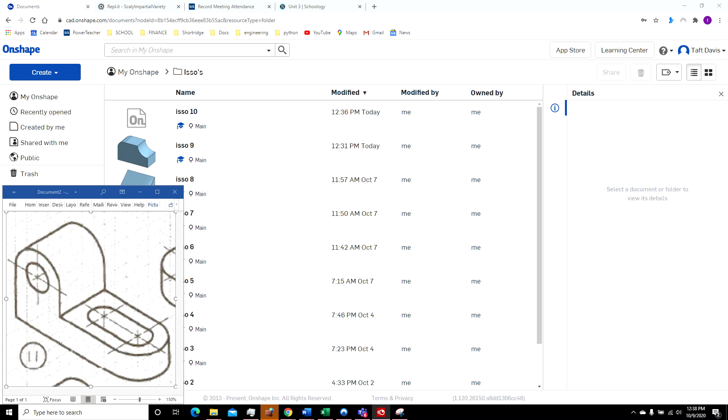All right, now we're going to work on isso 11. I'm already in my Isso's folder, so I'm going to create a document and call this one isso 11.

I want to work on the front view right here and make an L shape, then we're going to use the fillet to round off this top and the side, and then cut our holes through the shapes.

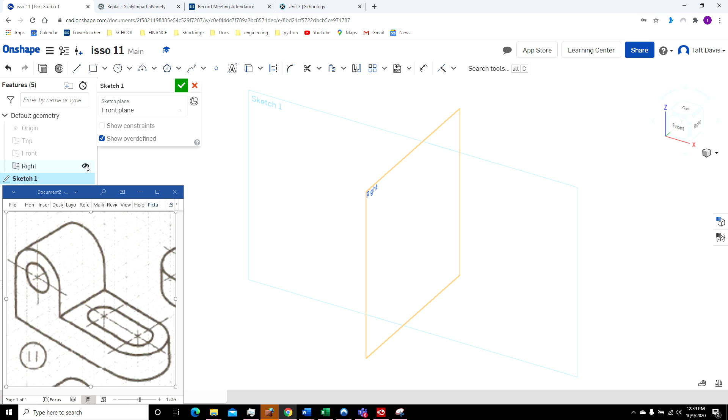So I'm going to click on the front and click Sketch. Hide the other planes and click on front right here. Now there's a couple ways I can do this.

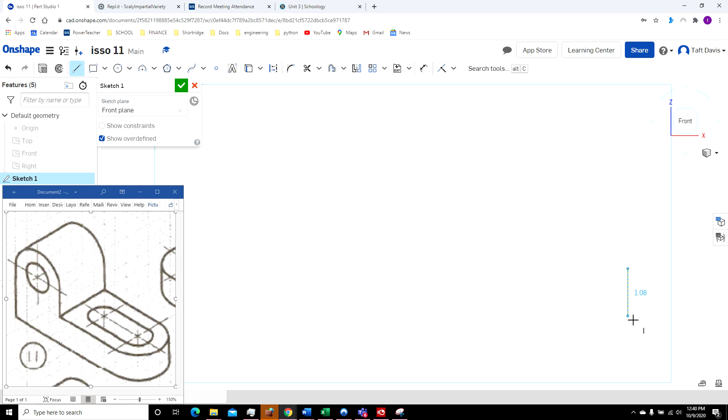I can use the line tool and draw this out, or I could do two rectangles. I think I'll go ahead and use the line tool. I'll start over here on the side, come down, and make this 2 inches. Now I'm going to come across.

If I look at my shape over here, it's 1, 2, 3, 4, 5, 6, 7, 8, 9, 10. And if we come all the way out here, that makes it 11. So I'll type in 11, enter.

Now going up, I want this total height right here, so that goes up 1, 2, 3, 4, 5, 6 places. So I get that dotted line, I can see that it's vertical. So I'm going to type in 6, enter.

And if I look at this, it's 1, 2, 3, 4 inches wide. I'm going to click, type in 4, enter.

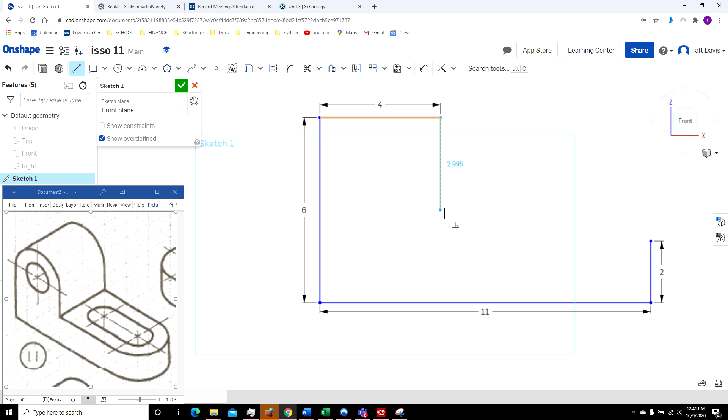Then I know it comes down 4 because that base is 2 inches, the total height is 6. So I'm going to click, type in 4, and then come on over here and connect to this side.

I'm going to click the isometric view. We're going to extrude it, and it's 1, 2, 3, 4 inches deep.

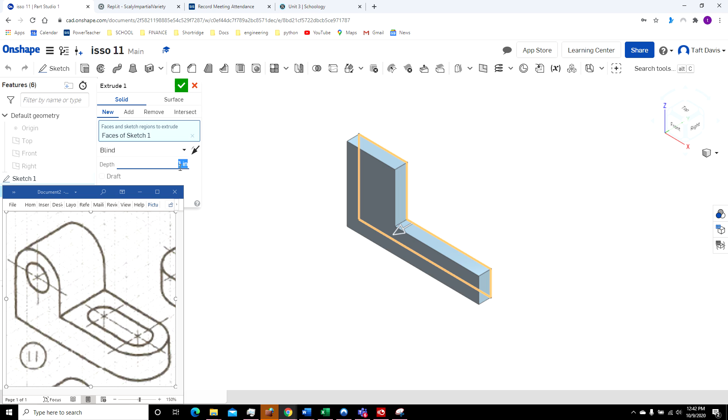Okay, so now I've got this basic shape right here, so I'm going to round these off using the fillet.

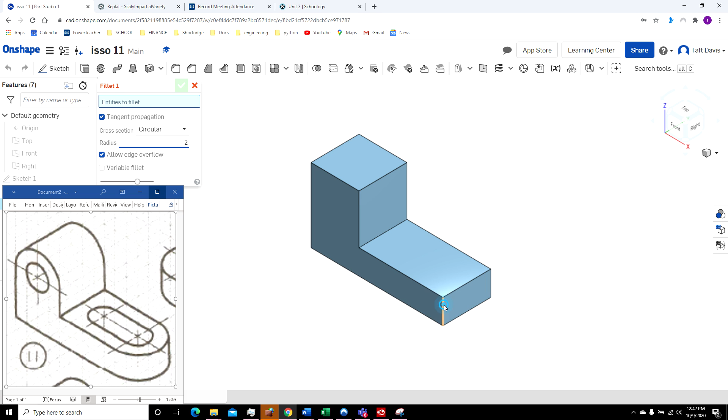Here it's asking for the radius. Since this is 4 inches wide and this is a half circle, that means my radius is 2 inches. So I'm going to click on this corner and this corner.

Now the same up here. This is 4 inches in diameter, which means the radius is 2. I'm going to click there, click there. Check. Okay, so now we've got this basic shape.

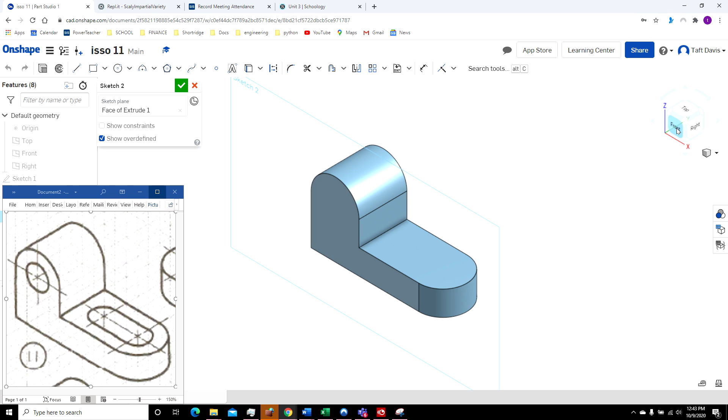I just need to cut the holes in it. I'll cut this circle out first. So I'm going to click on the front, Sketch, and click on front right here.

Move this over a little bit. I'm going to use the center circle. Now, one of the nice things that Onshape does for us, it lets us know when we're at the center of a circle. Okay, so right there, I know I'm at the center, so I'm not even going to have to worry about dimensioning after I make my circle.

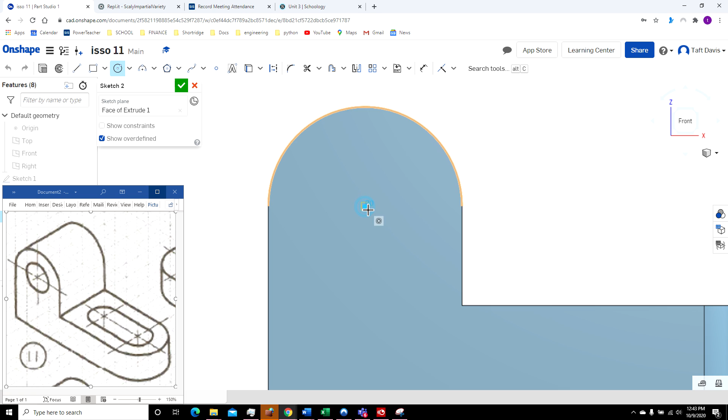And since I'm doing the center circle, I'm going to drag this out. My circle has a diameter of 2 inches, so I just type in 2, enter.

Then I want to extrude. I'll go ahead and make this ISO. I don't want it to go out, I want it to remove.

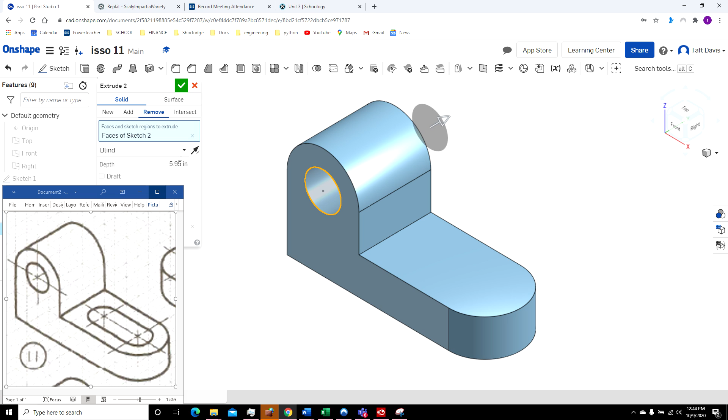And it's okay if I go too far. I mean, I could type in 4 inches right here, but if it goes 5 inches, because when you cut the hole, after you get all the way through, it doesn't matter how far you go, you still have the hole all the way through it. Okay, so now I've got this circle cut out.

Now I need to make this one, so I'm going to do that on this top surface right here. I'm going to click Sketch, click on Top.

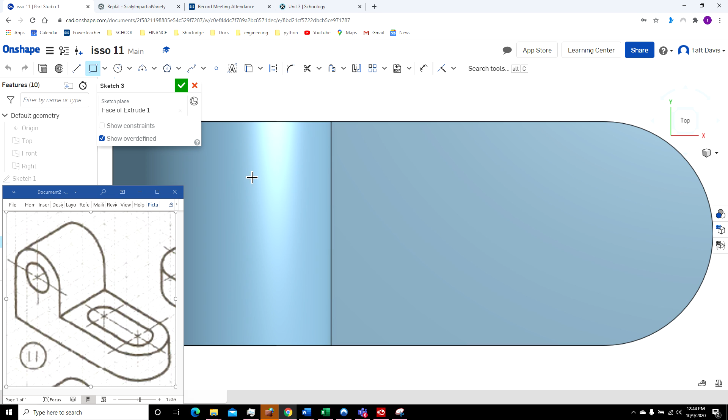Now I'm going to make a rectangle and then use the fillet to round it off. I'm going to come over here, use the 2-point and just kind of drag. Okay, if I look at my rectangle, it's 1, 2, 3, 4, 5 inches long.

I'll type in 5. And then it's 2 inches wide, so I'll say 2, enter.

All right, now if we look at this, it's 1 inch from this edge. It's also 1 inch from that edge, so I can dimension it from either side. So I'm going to dimension. I'll click here, click there, make that 1 inch.

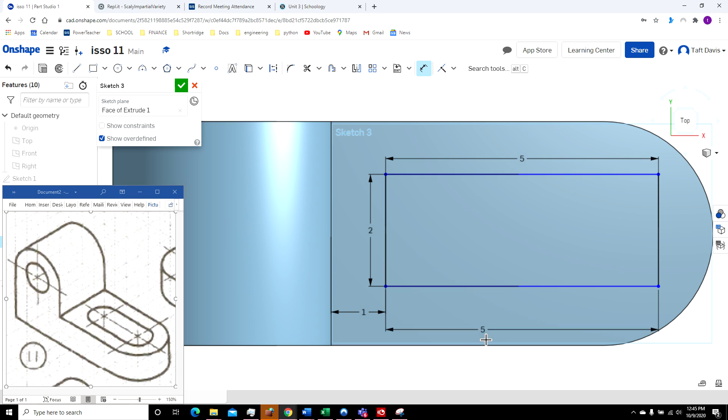Okay, then it's 1 inch from each side here, so it doesn't matter if I do the top or bottom. So I'm going to click here, click there, make that 1 inch.

Okay, I want to click on the isometric view. I want to extrude it. Again, I want to remove, and we need to go at least 2 inches.

All right, now I'm going to use the fillet. And this has a radius of 1 inch. It's got a diameter of 2 inch, radius of 1 inch. So I'm going to type in 1.

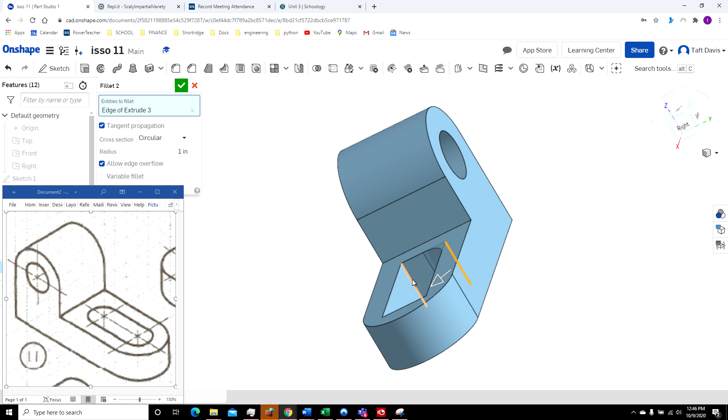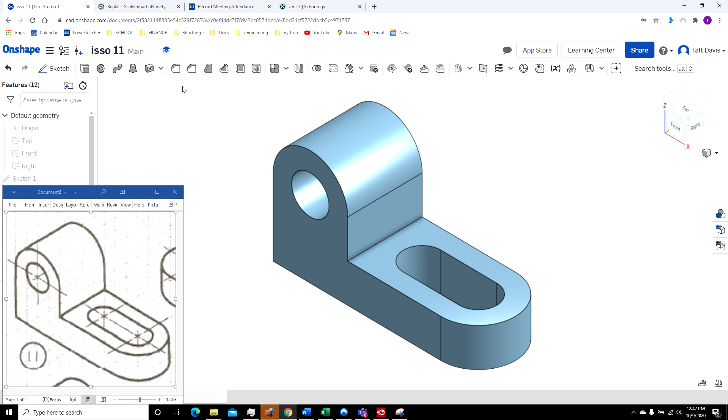Click there. And I can use my mouse to move this a little bit easier, but just in case you don't have a mouse and you're using the pad, it might be easier to do it this way. I'm just going to hit each of those corners, click back on isometric. And that's ISO 11.